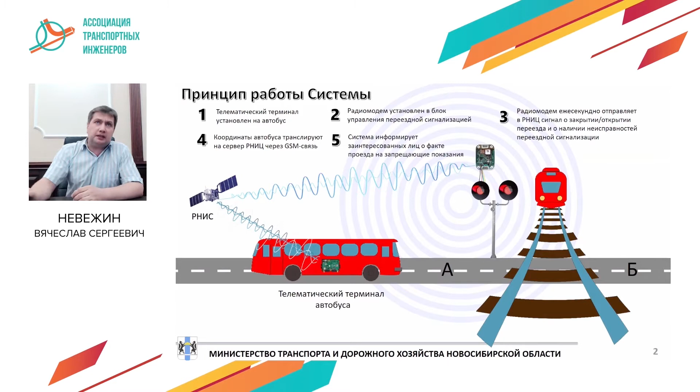That's what this equipment looks like. It's a small box on the cabinet.

Advantages and disadvantages - we have both, but there is no video surveillance here. As to the price, it's no more than 10,000 rubles. Video surveillance equipment is several times more expensive.

After we started using this system, we equipped 11 crossings with that equipment. The Western Siberian Railroad saw good perspectives here - about 60 crossings like that, where there is mobility of regular routes.

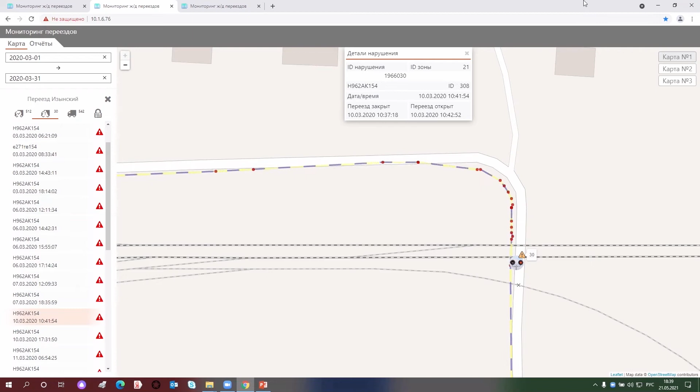It was 10:37 when the railway crossing was shut down, and after that some cars continued moving over this crossing. We can see that the driver was waiting for the train to pass, and then right after that he rushed forward at a very high speed. Another driver did something wrong as well. So we record all that.

This software allows us to analyze all the implications related to closure of the traffic lights. This is information for railroad specialists, because within 2 seconds before the closure starts, that means there is some fault, some failure. But when it's between 7 to 15 minutes that the railway crossing was closed, it was more than 265 times that this railway crossing was blocked.

Something should be done about it, because 30 minutes of a closed railway crossing means that drivers will not wait, and they will start moving despite the prohibiting signal, because of the psychology of drivers. They cannot wait that long.

Here is the equipment, here is the device. Without going into detail, let's see the presentation. I may take your questions. If you display more interest in that, I'll tell you maybe outside this conference.

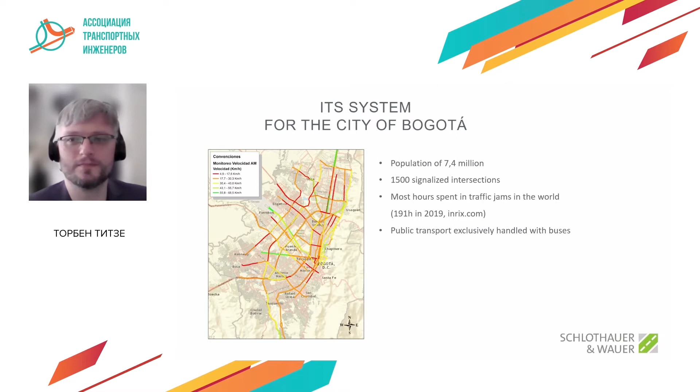Hello, Torben. Thank you very much. Hello, everyone. Let me introduce you to my city, Bogota, which is the capital of Colombia. It is a metropolitan city with around 7 million inhabitants in the main city, but actually over 8 million in the metropolitan region, which means an important number of commuting trips daily and a big transit issue. According to the Global Traffic Scorecard, Bogota is the most congested city in the world.

Drivers in the Colombian capital lose about 191 hours a year due to congestion, which is equivalent to around 8 days in a traffic jam. For comparison, in the same ranking, Moscow loses 100 hours and St. Petersburg 74. Also, the picture you can see in the slide represents with colors the average speed in the city, in the main streets.

Main streets have 2 or 3 lanes per direction. The green color means they registered an average speed over 40 kilometers per hour, and red under 15 kilometers per hour. As you can notice, the majority is in red or orange, with an average speed in the whole city of about 17 kilometers per hour.

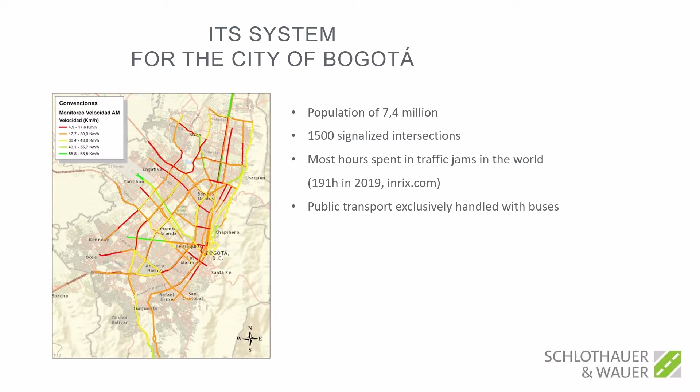In 2018, the City Mobility Office embarked on a big project. This project aimed at the modernization of the traffic light system of the city. With just one tender process, the city contracted the detailed design of the intelligent system, the traffic central, the supplying of 1,200 controllers, 6,900 signal heads, 1,600 cameras, civil works, installations, and commissioning.

As you can see here in the slide, there are many stakeholders involved in the project. Siemens was the integrator—they offered the central system and 2/3 of the equipment. SWARCO and Schlothauer Wauer did the traffic study. We provided the central adaptive system, which is the topic Torben is going to explain after me. We did also the planning of 1/3 of the equipment, and the communication and the civil works were delivered by third parties.

It was planned to be completed in 18 months. It was the wish of the city, but due to the pandemic and also some unexpected events, it was extended. We are currently finalizing this big project very successfully after 32 months.

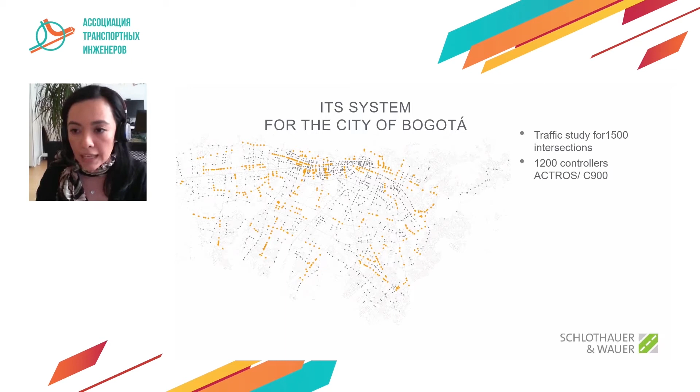To go more in depth, this is the city of Bogota. Those gray points are the 1,500 intersections. For those, the company Schlothauer together with SWARCO Andina did the traffic study based on a previous study. We defined which controllers should operate in which operation mode, and therefore we decided how many traffic actuated controls should be in the city, having a restricted amount or number of cameras.

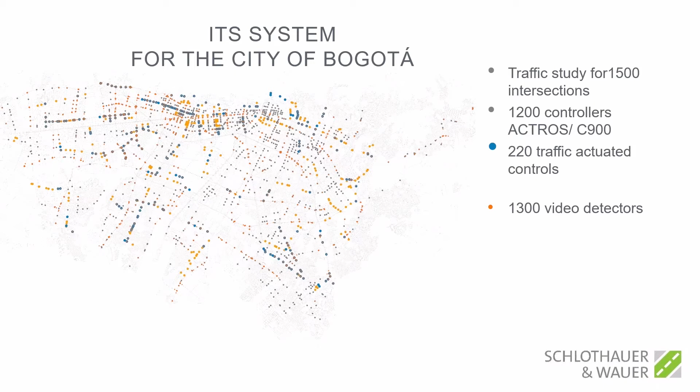The result was 220 traffic actuated controls and 1,300 video detectors, and also 50 coordinated corridors, which belong also to 58 adaptive networks that are controlled by INES, which is the topic that Torben will explain to you. Go ahead, please, Torben.

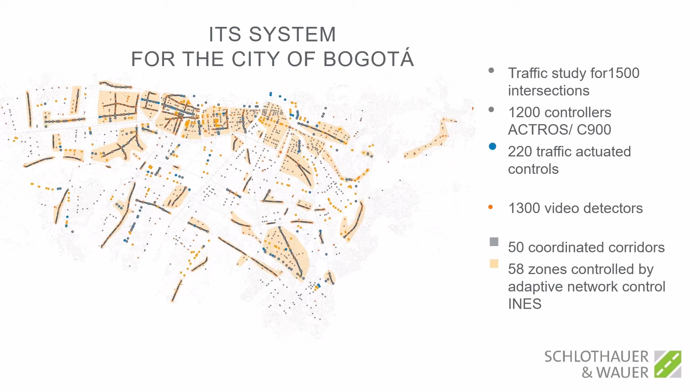Thank you very much for that introduction to the project. I also want to sum up a few challenges that we were facing during the project, or that were presented to us, which we had to deal with. First of all, there are the expectations of the client.

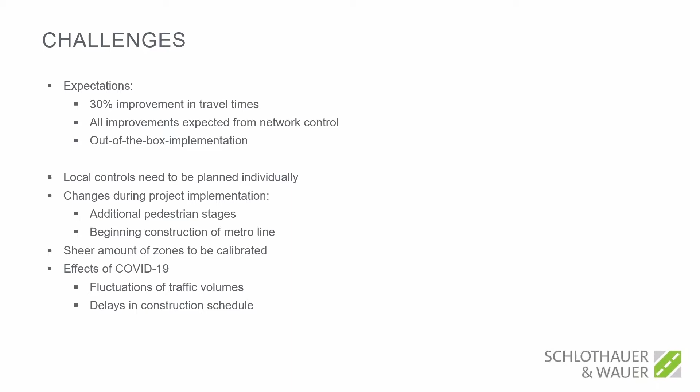As in many cases, when it comes to expectations towards a network control, there are some numbers circulating around the world of traffic management. We say that you could reach improvements of up to 30% just by re-regulating the traffic. This is an expectation that can hardly be met, except for the fact that maybe the case in the original state of a city was that the traffic there was so badly managed that it's quite easy to make an improvement.

But as we know, and also if we see the situation in Bogota, the real problem of the city actually is a highly oversaturated network, and a public transport sector that still needs to be extended significantly. Anyways, we have to deal with these expectations and also manage them over the course of the project.

At some point, also the client expresses an expectation that a network control or an intelligent traffic algorithm could provide something like an out-of-the-box instant solution, like buying an iPhone, connecting it to the power, and then a whole new world begins from the start. What it actually means to optimize traffic in such a big metropolitan area is actually hard and detailed work on the local controllers.

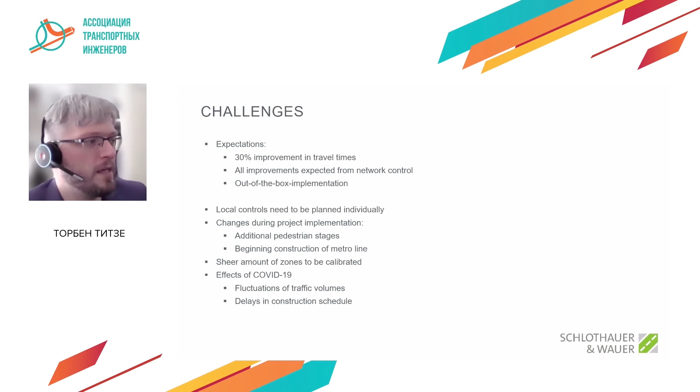So our solution has to be flexible enough to be adapted during the process, and it must be a feature from our perspective of a traffic network or intelligent traffic network solution, that there is not only one calibration phase, but the ability of the customer to adapt to these changing conditions. Also, the sheer amount of the zones, as I said, we practically replanned the whole city.

And then, of course, unfortunately, the effects of the pandemic, meaning that we had to deal with fluctuating traffic volumes. The volumes we saw sometimes during the calibration phase was not the normal volume that you would see outside of a lockdown situation. And also, as Diana has already mentioned, we had to deal with a certain delay just due to construction having to be delayed because of the pandemic.

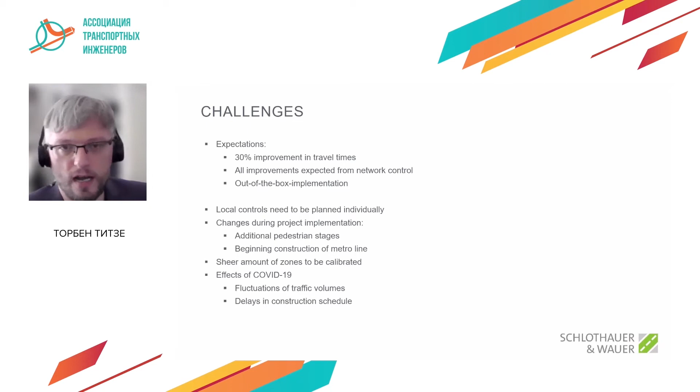So these are the challenges. We need a flexible system. We need a system that can also be worked with locally by local engineers. So how does our system adapt to these challenges?

In short, what is INES? We will not go into all the details of what INES does and how it does it. I will just give a short overview of what it usually does and what we did, especially for Bogota.

INES is an adaptive network control system. Its main part is an automatic plan selection. It also does green time redistribution if the local control is supporting this. It's responding to congestion if we have speed detection, which of course in Bogota we had.

What's distinct compared to other network control algorithms is that its control algorithm is independent of the control that is in the local controller. It is actually dependent on the local controller being programmed more or less intelligently already, having either a fixed time plan that has been engineered according to the local control, or a traffic actuated control that is customized.

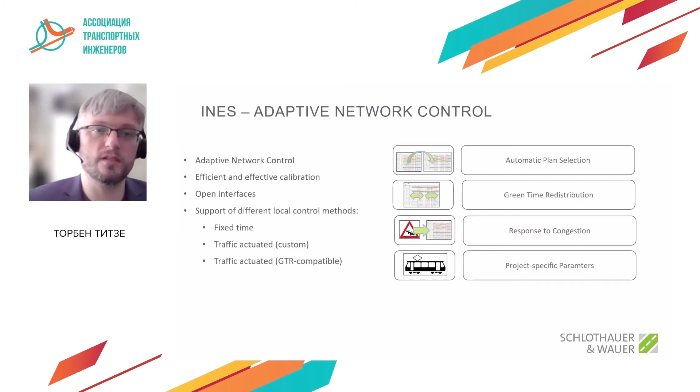In our case, we had a traffic actuated control that implemented an INES specific interface that enables us to do green time redistribution online. The system architecture: the INES server is an additional server. INES is not replacing a traffic central computer. It is communicating with a traffic central computer over open interfaces.

OCIT is the current implementation, which is understood by the traffic centrals of leading market participants. What we do is request detector data from the traffic central, process it, and then give back desired program numbers or parameters to change the green times.

As I said, one of the challenges in the project was we needed a tool that could be calibrated fast. When you have 50 zones to calibrate over the course of 32 months, originally an 18 month project period, you need a system that has a limited number of parameters.

We achieve this by using the saturation as our main control parameter, the unit that we try to optimize. For those of you not familiar with green times or traffic planning on traffic lights, it is the ratio between the needed green time and the available green time at a traffic light, which means this value is independent of the number of lanes, of the cycle time at the intersection, or any other capacity factors that might change.

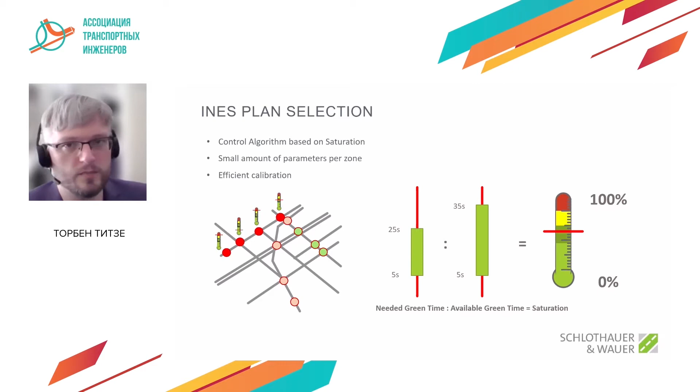It is the ratio of the current traffic in comparison to the capacity. So when we are doing a calibration process here, we are faster than just changing any thresholds like in other systems or those based on simulations.

Apart from that, we are also using strategic detection, meaning that we measure speed as well as traffic volumes. You have here this matrix showing on the x-axis the current traffic volume, and on the y-axis the speed, and every dot in this matrix represents the combination between speed and volume during a certain period of the day.

And by dividing this matrix into certain sectors, we can easily determine what the current situation in certain areas of the network is. So if we could detect congestion, we automatically respond by sending a plan with a higher cycle time.

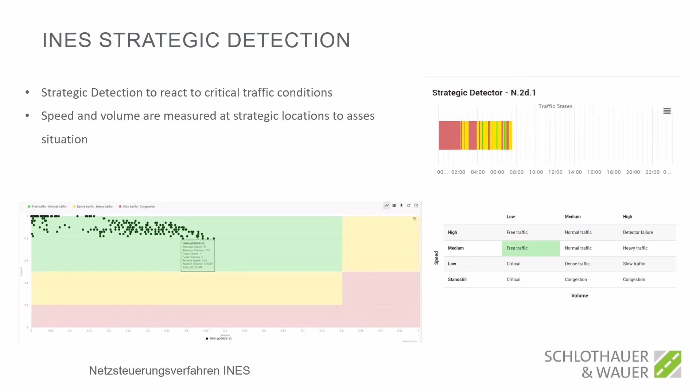In its green time redistribution, I already mentioned in our project, we had the possibility to implement this interface in the local controls, meaning that the local controller, although it does the cycle-to-cycle green time split or the decisions within the cycle, INES is determining the parameters on which these decisions are based.

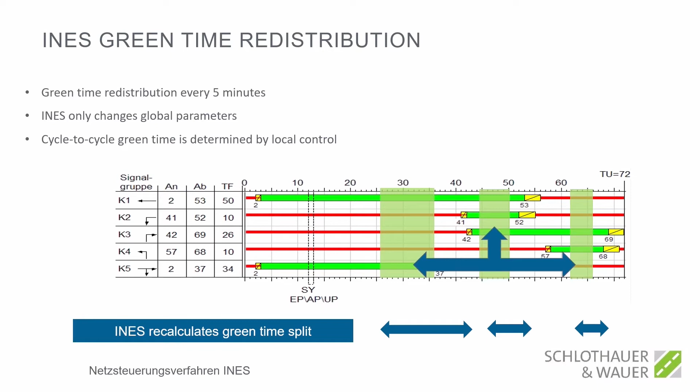So you might say, when it comes to green time redistribution, the intelligence of our system is kind of divided between the local controller, also the local planning of the engineer responsible for the intersection and knowing the intersection, and the planner of the network level, of the macroscopic level, who is responsible for fine-tuning the strategy and the overall behavior of the zone. These are all functionalities that we had implemented at INES for the last decade already.

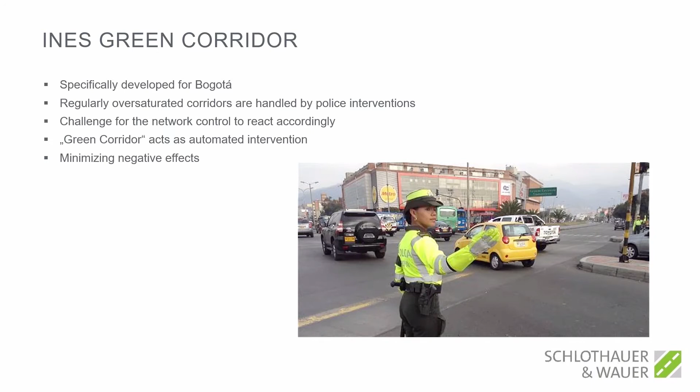A new functionality that we developed, especially for the situation in Bogota, is what we called green corridor. The situation that we found in the city is that in some cases, on some vital arterial corridors, the saturation or the traffic conditions are getting so bad that the police regularly has to do interventions by just letting the main direction pass into the city. And we found that we would not be able to work around this situation by just saying we ignore it.

If the police is doing stuff like that, we are getting measured values that make it hard for our network algorithm to interpret what is actually happening, because cars are passing over a traffic light without actually respecting the traffic light because the police tells them so. So what we did to work around this, we developed an algorithm that kind of automates this mechanic.

So in the moment that we are already in the highest capacity program, and we detect still that there is tailback, although there is already no alternative to give more capacity via the traffic lights, we are telling the traffic light to ignore the secondary direction for one cycle.

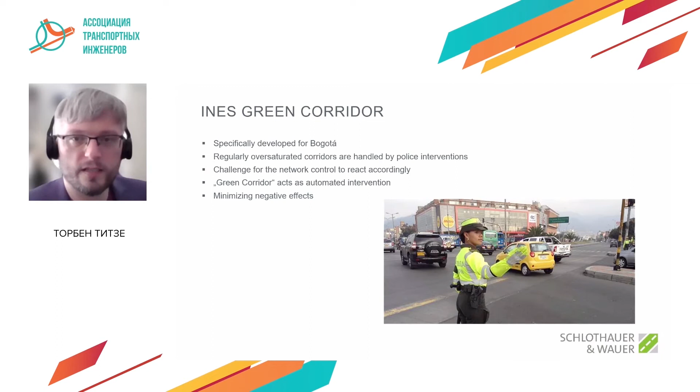Basically what the police would do, but at the same time, we are also monitoring in the secondary direction if there is a tailback building up there, because the negative effect of what the police is doing there, of course, is that everybody who is not on the main arterial road has to wait significantly longer.

And what we did with our algorithm is to check in these secondary roads if there is tailbacks building up, and if the tailback is reaching a certain point, we are stopping the arterial prioritization and only allow it if the situation in the secondary direction is not critical. So that, in short, is the description of our new implementation for Bogota.

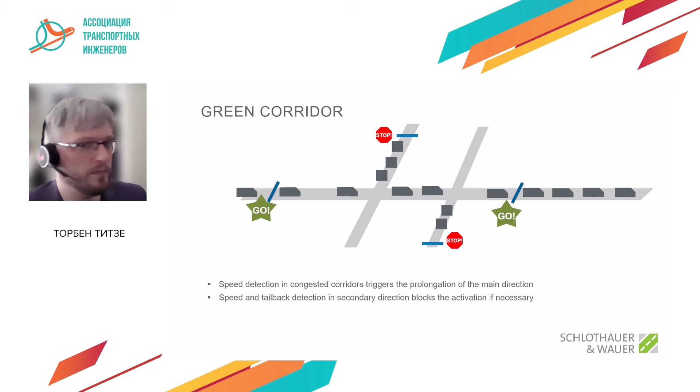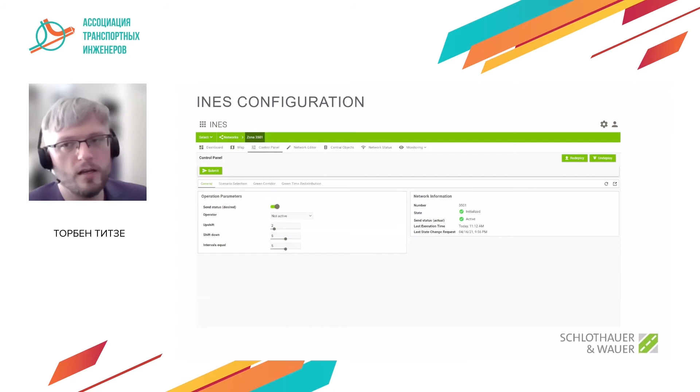Maybe just a few examples of how INES is controlled. We are having a modern web interface where the users can change all the parameters via a web browser when they have access to the system. Also, the parameters that are used for the decision and the green time redistribution can be changed here.

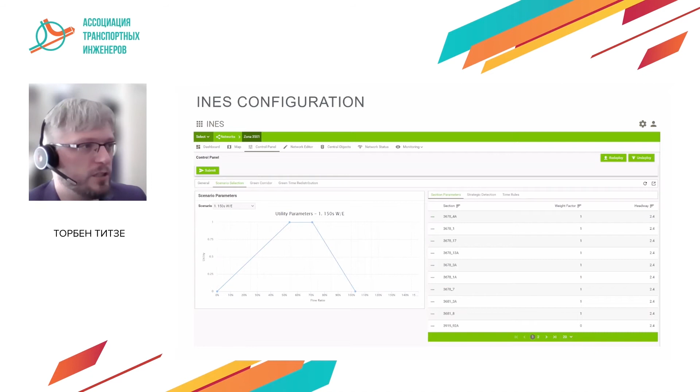We have easily understandable graphics showing the decisions of our network algorithm. And also something that we developed specifically for Bogota, we were always asked to make a before and after comparison, kind of justify that the decisions our network control is doing are actually contributing to an improvement of the situation. And to do this evaluation for the whole city, the easiest way for us was to directly integrate it into the algorithm itself.

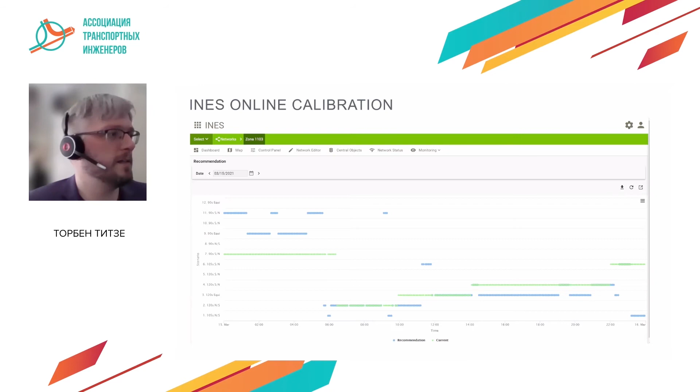So at the same time that our system is making decisions, suggesting new programs for the traffic central, it is at the same time evaluating these decisions and calculating values that show that we are reducing waiting times, that we are reducing saturations in certain phases.

When you look at this specific example, you will see here an improvement of up to 40% in the coordinated corridor. But I have to say, this is only for a certain corridor during certain hours. So usually I would say the improvement that we are having in the loss time only in the main corridors is between 10 and 20% compared to what we have without a network control.

So what are the results? We have improvements for pedestrians in off-peak hours. We have lost time reduction in coordinated corridors, what I said, between 10 and 20%.

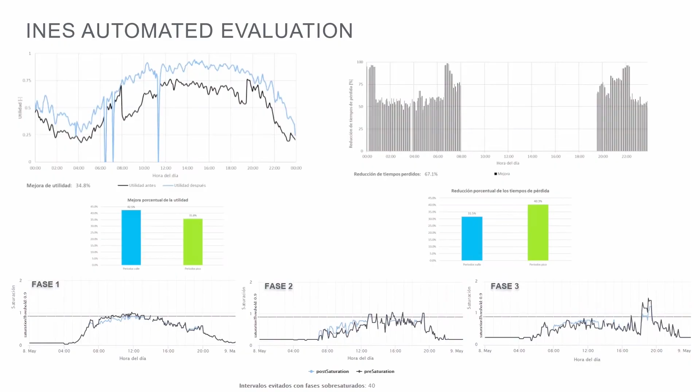Due to the nature of the project, there was a knowledge transfer from our company to local companies we worked with, and also to the local authorities. We tried to make them understand how the system works, because we didn't want a situation where whenever something isn't working, they have to call Germany to fix the server. We want our system to be accessible and maintainable so local authorities can work with it and maintain it themselves. We also proved that INES is efficient enough to do all this calibration work within the schedule.

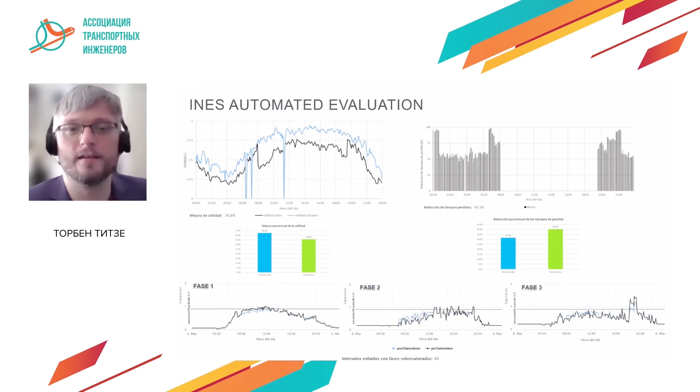One last note, moving to the last slide where everything comes together. We actually had a reduction of hours spent in traffic jams between 2019 and 2020 of 30%. Unfortunately, this was due to COVID-19 and not only because of our work. So thank you for your attention.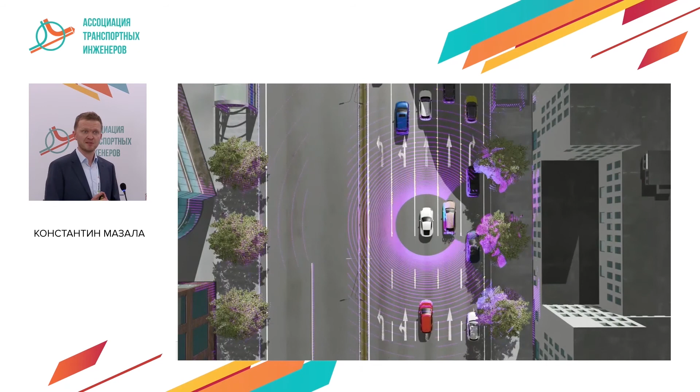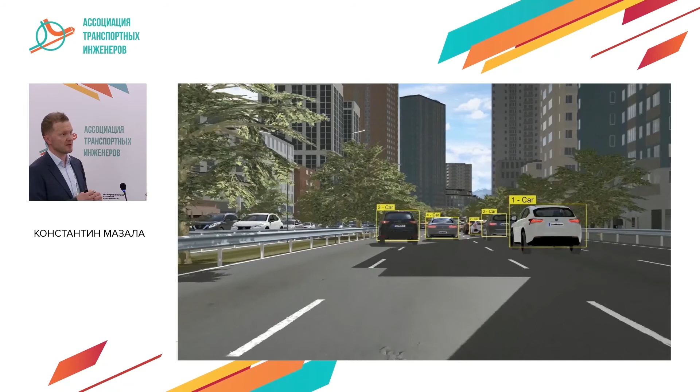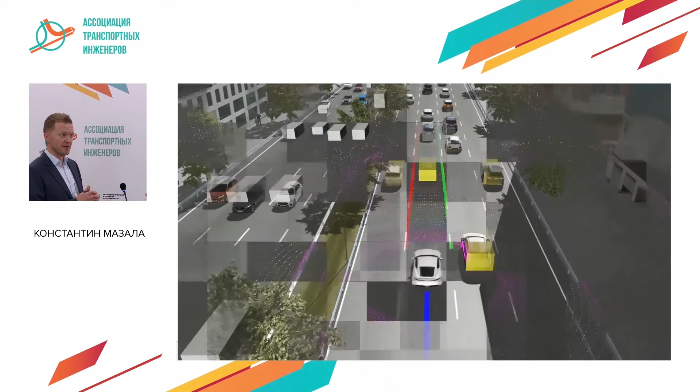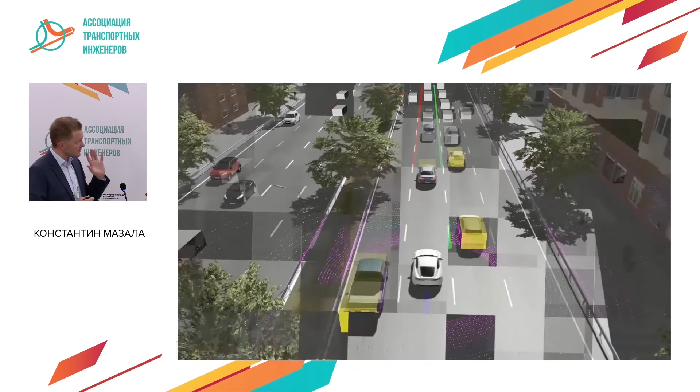Our CarMaker product becomes somewhat of a Russian product, the so-called import substitution in action. With the help of external sensors, the car makers provide information about the sensors so the car can localize itself and perform segmentation. The vehicle and all management blocks, plus dense or less dense traffic, and different degrees of driver aggressiveness can be adjusted, allowing us to include unmanned driving as well.

Another important point is that the development of software and the development of a vehicle have become one and the same thing today. Two worlds have merged to form one.

These technologies have been used for a long time, with planning, calculation, and evaluation of traffic flows taken into account, using special interfaces. As for autonomous and unmanned vehicles, their participation in overall traffic is still a task we have to resolve in the near future.

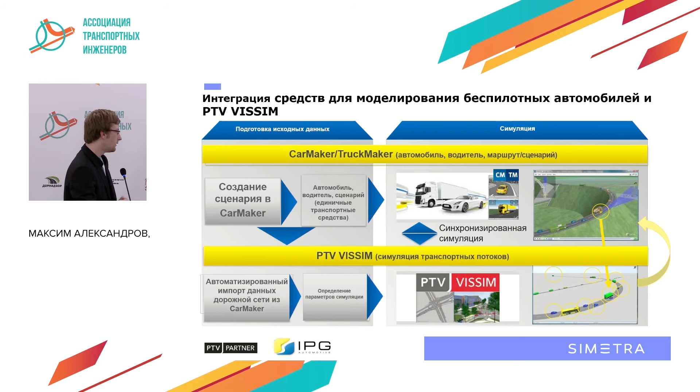They will be worried whether their regulation of traffic lights will have to be changed, what else has to be changed for the system to work safely and stably without additional jams, when the flows of manned and unmanned vehicles—because it is practically impossible to separate them, aside from some experimental polygons. With that, I would like to finish, and if you have any questions, you're welcome.

I would like to use this chance and go back to the very beginning. The topic you've touched is really very broad and deep. We might have dedicated another 2-day conference to this topic.

I have a question for you, Konstantin. You've mentioned very fairly that modern vehicles have a lot of driver aids. For example, some brands now have a system that recognizes the road sign, and if the system is on, it doesn't allow the driver to drive quicker than the sign allows. Is it not being discussed that for safety, there may be different zones—for example, zones for calming the traffic, or other zones where the speed has to be limited? Don't you consider the so-called external managing, where you install roadside equipment in a very special zone where such a system is activated, and the vehicles cannot drive quicker than what is allowed?

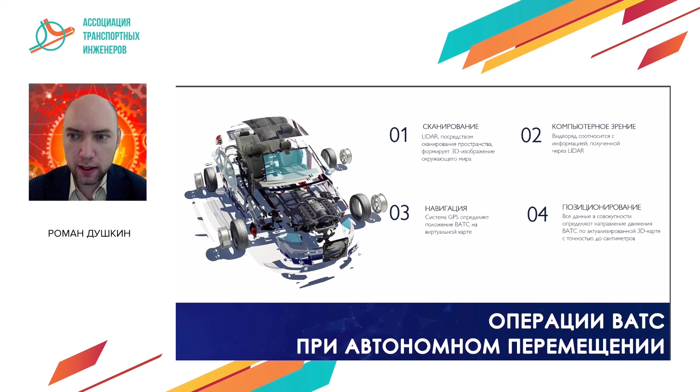Today, manufacturers look more and more into this area, but I'm not going to tell you more about highly automated vehicles or VATS in Russian, because the time is short. Let's pass over to the topic of my presentation and what types of highly automated vehicles exist.

We'll use methods for building the ITS, so-called multi-agent systems. They allow us to build special networks where the nodes are connected vehicles, and such networks allow us to cover large areas where there is no centralized coverage. This is very important to secure the connectivity of each highly automated vehicle to their managing network.

As for types of interaction, there are four types: vehicle to vehicle, vehicle to central system, vehicle to infrastructure, and vehicle to pedestrian. And also car to infrastructure is another mode. In order to provide for a smooth passage through the crossing, we should use the methods of V2X and create networks for connection of the transport vehicles.

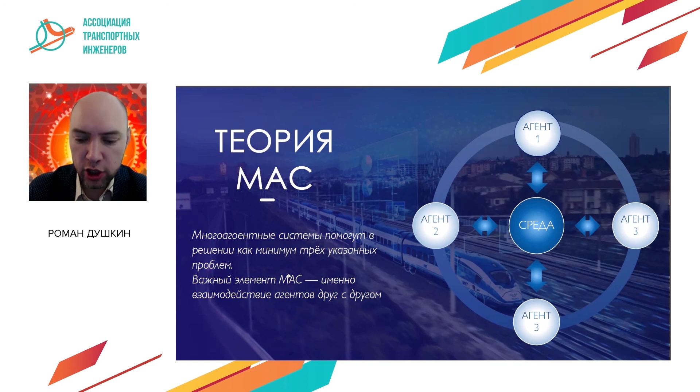We can use a hybrid approach. The centralized scheme of operations is based on a platform which is part of a uniform platform of the system traffic management, which can calculate speeds of non-stop passing at traffic lights in a centralized way for all cars to reach equilibrium, and then pass the information to different cars. It's reinforced learning, based on neural networks.

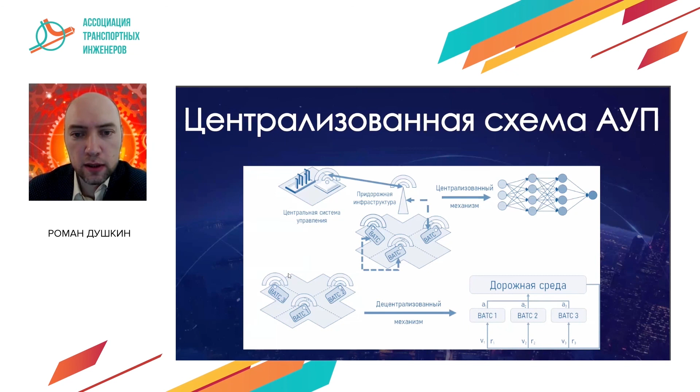We are rolling this out in our solution, and I guess shortly we'll offer it to different metropolitan areas. But when there is a decentralized scheme of autonomous, detached control of crossing, we need more capacities for decentralization of those computations, something like blockchain in a distributed network. These tasks are less developed and evoke specific interest, but that's for the future.

It's better and simpler to use a centralized approach, whereby there are fewer delays. There's a risk to deal with lots of delays, and since it's about physical mobility and movement of motor vehicles, these are devices that are sources of high hazard. So we should do simulations first, the ones we heard about in the previous presentation.

Now, briefly about those methods which already exist for non-stop movement. All those methods are referred to as green light optimizations, plus computation of the speed the motor vehicle should apply to pass the next crossing without stopping.